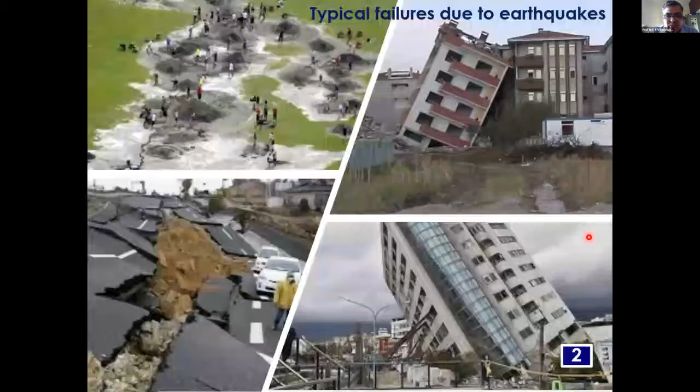Going to the next, in order to explain why we are doing all this - the second term, what dynamic compaction is basically - the typical failures that can occur, which is the theme of the conference, is how earthquakes can actually create distress. I have seen that Professor Gopal Madabhushi and Professor Elgamal and other experts are actually going to speak.

These type of things, when they actually happen in our case, can cause alarming situations to us. And despite other virus problems, we can also have problems due to these particular natural hazards. So what you see here is what I understand as the Christchurch liquefaction, which has been put up by NDMA, and there are also some building failures.

As you can see, these are some typical failures of a road and a building collapse. These things actually cause alarming situations as far as this is concerned.

If you try to find avenues for improvement, we actually have many methods for countermeasures. So I'm concentrating here on what are the countermeasures against liquefaction.

We all know liquefaction, and methods to prevent or counter its occurrence mean you actually have to do correct ground improvement. One method is increasing density, solidification, adjusting the grain size distribution, and lowering the degree of saturation. Below the foundation, they try to pump air so that the degree of saturation of the soil is decreased, and the lower the degree of saturation, the less susceptible it is to liquefaction.

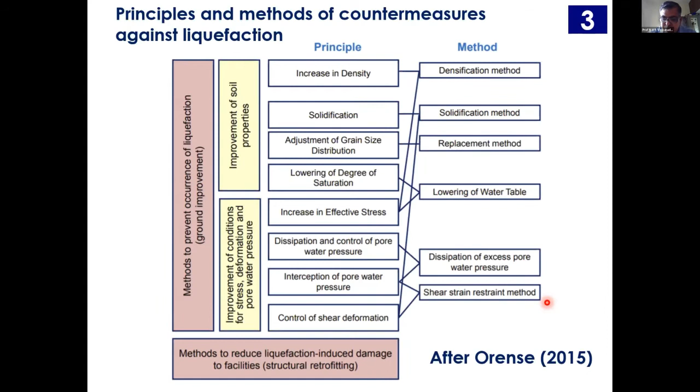So before that, why do we need to model the earthquake in the centrifuge? Is there any relevance? One thing is that earthquake centrifuge modeling addresses one of the natural phenomena that occurs in the field, which has got ill effects, damaging structures and subjecting them to distress.

Though a lot of work is happening, very little quantitative field data exists on the response of soil deposits and geotechnical structures to strong motion. The opportunity is basically to study the phenomenon of earthquake-induced liquefaction and the principle driving this.

Many people have done classic work here, which I'm not going into detail on. But what centrifuge model testing offers is basically a unique opportunity to test the performance of structures before the earthquake, to see what actually happens.

In fact, now with the advent of high-speed cameras, we can see how the structure is actually performing during the earthquake. Otherwise, without these, we used to see only before and after the earthquake. But now, with cameras recording at 500 or 1000 frames per second, they are able to capture what is happening before and during the earthquake.

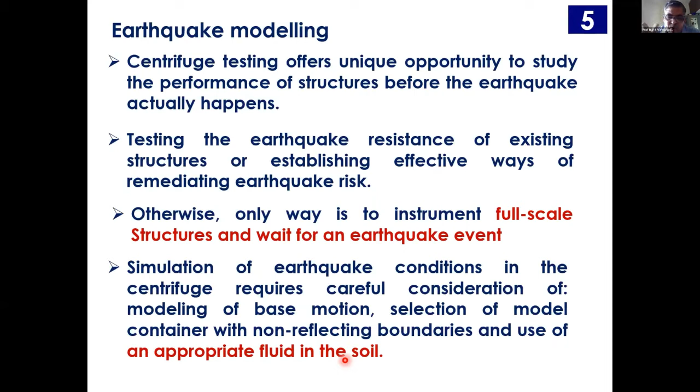This non-reflecting boundary concept is very interesting, and maintaining the leak proofness of that is very, very difficult and important. What I'm highlighting here is the requirement of an appropriate fluid in the soil, which we will discuss. In modeling earthquakes, one requirement is a powerful base motion creator, what we call a shaking system, and the second is a proper earthquake model container - generally hexagonal or rectangular shape - along with the need for tweaking the model pore fluid, which is very difficult.

Now let us consider this, from my lecture notes: an embankment having prototype dimensions, with length L and a certain height, subjected to sinusoidal motion. Let the displacement be given by amplitude in prototype times sine of 2 pi fp tp, where tp is the time and fp is the frequency.

When you differentiate once, you get the velocity of the small element, and differentiating again you get the acceleration, which is minus 2 pi fp whole square times ap times sine 2 pi fp tp. This is the amplitude of the perturbance actually subjected in the field.

Now assume that when considering small scale physical modeling, L becomes L by N, and the element with dimensions dx, dy, dz becomes dx by n, dy by n, and dz by n - the volume is reduced by 1 by n cube. But if the stress is sigma in the field, the stress in the small scale model is also sigma.

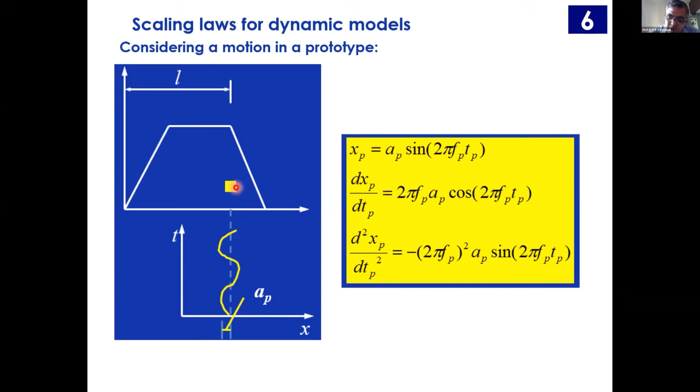So let us consider a model where Lm equals Lp by n, with a small element dx by n, dy by n, dz by n, subjected to the same or identical motion: Xm equals Am, the amplitude in the model, times sine 2 pi fm tm. Suppose the amplitude in the prototype is 15 mm - in the model it will be 15 by n.

N is nothing but the gravity level at which it has been subjected. That means if you scale down by, say, 30 gravities, then n equals 30, and since Lm equals Lp by n, this n equals 30.

If the material is uniform with unit weight gamma, then at this point the stress is sigma v equals gamma into z, or gamma written as rho g z. So sigma v equals rho g z, but mass density is the same in model and prototype.

With that, when gm becomes n times gp, and hm equals hp by n, what happens is the stress in the model, sigma v, equals rho g hp. That means if a small scale model is scaled down by n times and subjected to n times the gravity level, there is stress equality.

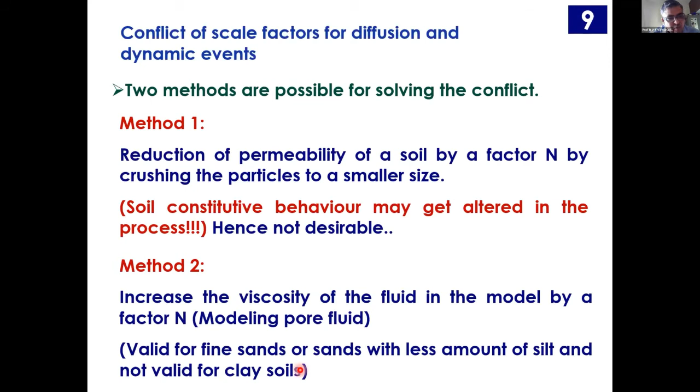But if you are having fine sands and sands with some fines up to 10%, I'm talking about non-plastic fines, there is a possibility that we can replace the pore fluid. How can we replace it? Let us see. First method is ruled out because crushing of soil particles is very, very difficult.

Now, while teaching permeability, we introduce a term called coefficient of permeability, K, absolute permeability, and unit weight of water, and kinematic viscosity of water. K, the absolute permeability, is a function of the Kozeny-Carman equation, or Taylor's equation when you consider it. Higher the specific surface area, less is the permeability. All those things we know. So K is the absolute permeability, which is a function of the soil skeleton.

If you are able to have an identical soil skeleton, then Km and Kp both are the same. Gamma W is nothing but the unit weight of water. Mu is 1 centistoke at 20 degrees, for water at 20 degrees, that is the kinematic viscosity of water.

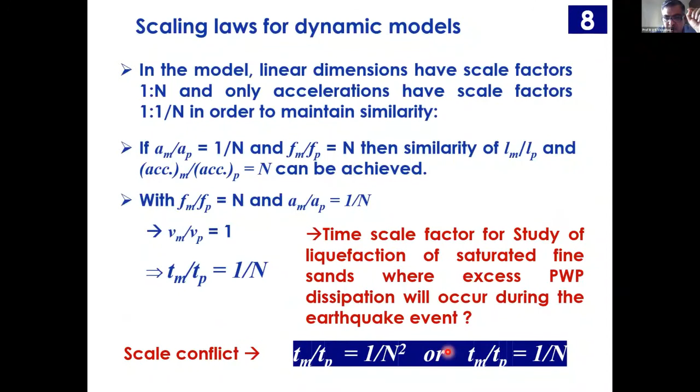So Vm is equal to Km Im, Vp is equal to Kp Ip. With that, I will get Vm is equal to Vp, that's Darcy velocity or flow velocity, which is the same, but Tm by Tp is equal to 1 by n. So with that, I'm able to match these two scale factors. Previously, it was 1 by n square, now I have got both the scale factors to equal 1 by n. This means you actually need to substitute water with a conventional pore fluid. We are having several pore fluids in the market.

For example, 100 centistoke silicone fluid is 100 times more viscous than water but has virtually the same density, though it's actually a little lighter than water. Suppose you are having a higher viscosity fluid, like mercury, with higher density. There is a possibility that the stresses in model and prototype don't match with each other.

Then the response of the model and prototype will be a problem. So if you are able to replace the pore fluid and get Km equal to Kp, and the time scale factor for diffusion equivalent to 1 by n, then there is a possibility that Tm by Tp is equal to 1 by n.

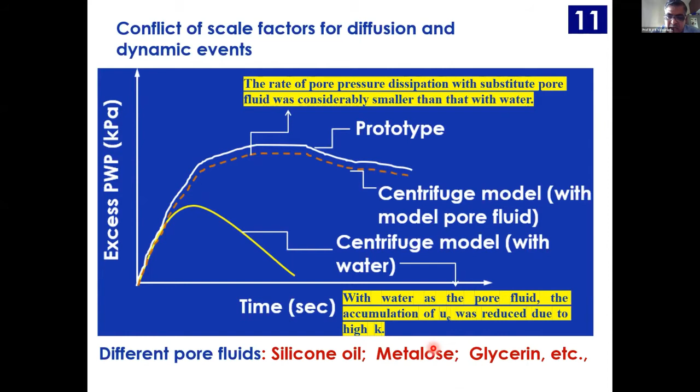Very recently, the centrifuge modelers—I should thank them—brought methyl ether or methylcellulose, one of the products used in bakery, into centrifuge modeling. It's very costly, but it's actually going to give you the flexibility needed.

So in order to do this, before that, I will get connected again on how we can actually model that.

Let us now talk about dynamic compaction. This is described in the German Geotechnical Engineering Handbook published in 1996. Dynamic compaction is nothing but dropping a known weight from a known height—it's actually potential energy.

When you do this in the primary pass, it's called grid spacing, 6 meter by 6 meter, and then you do it here and here, so there is a possibility that the entire ground can be impacted. The equipment requirement is very small, but there are conditions: particle velocity should not be high, and nearby structures should not be present.

Here, the potential energy scale factor in model and prototype is 1 by n cube. So the use of centrifuge modeling, and how to use it, is the main crux of this. Basically the pounding creates a depression, called a crater, at each drop location, and in the process it produces areal settlement and also displaces the soil.

If you look overall, dynamic compaction creates a drop height and uses a tamper. People have varied the tamper shapes—square, octagonal, triangular—and found that the octagonal one is effective, but we have actually taken a circular one.

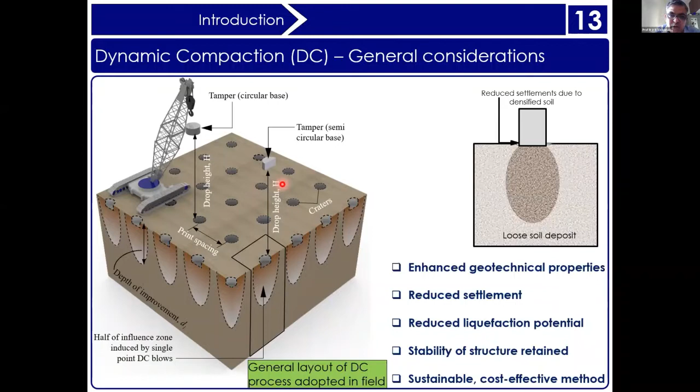With that, what happens? Enhanced geotechnical properties, reduced settlements, reduced liquefaction potential, and stability of the structure is retained—a sustainable and cost-effective method. These are the depths of improvement: for granular soils it's something like 4 to 5 meters, so definitely you can get that improvement depth. This is one of the octagonal tampers or pounders used. When you do this, you cover the entire loose area. Very, very nice.

I've noticed that in India, many people are actually using this. One thing I request you to note down: 10 to 20 meters is the height, even reduced by centrifuge modeling by n, to 20 by n meters. That means it's very difficult for me to put a crane at high gravities and do that. So for that, we need a mechanism.

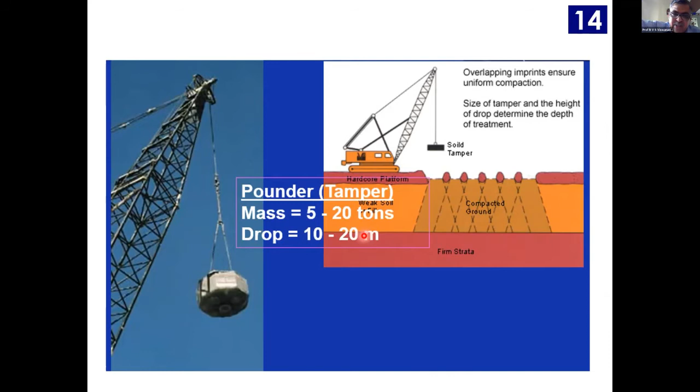This particular technique was actually put forward by Menard in 1975, wherein the illustration of the dynamic compaction is that whenever a drop is actually created, then it creates some sort of P and S waves, and Rayleigh waves are created. So you can see that.

Sorry to interrupt, sir. Another 5 minutes max.

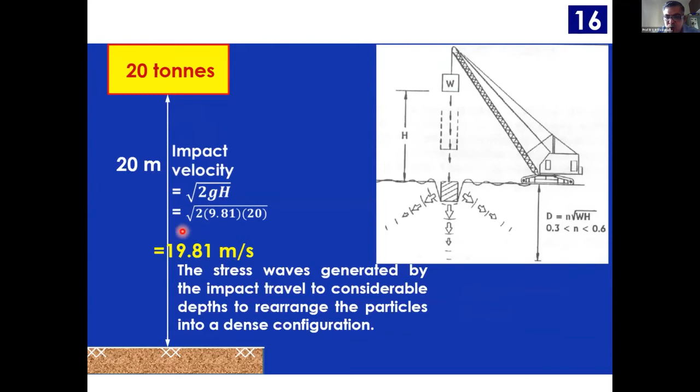Okay, so densification actually takes place. So when you model this in the prototype, the impact velocity is nothing but root of 2GH. Initial velocity is 0. With that, you will get 19.81 meters per second. And when you do this in centrifuge, you can see the same impact velocity — I'm able to do that with V equal to root of 2GH, but G is equal to nG. With that, 19.81 meters per second, I'm able to maintain. This is at 50 gravity.

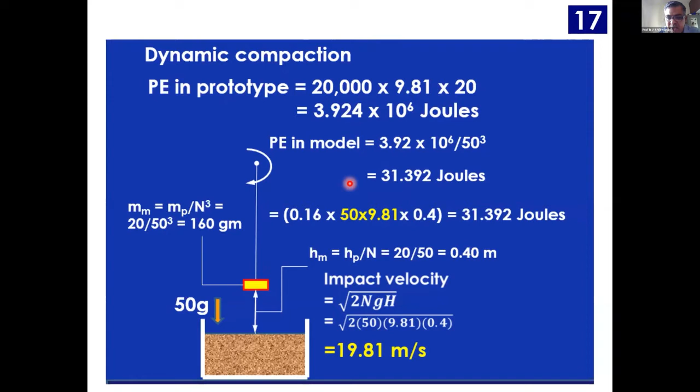But let us say that if I'm actually modeling some 20 meters and 20 tons, then I have the potential energy which is modeled. So this is how the potential energy which is required, potential energy in the model. Based on that, the dynamic compaction can be created in the model. This is how the problem is explained.

So based on a lot of deliberations, we actually have derived the scaling laws. Here also, the frequency of the blows will be n times, and the duration is 1 by n times, the duration between each blow.

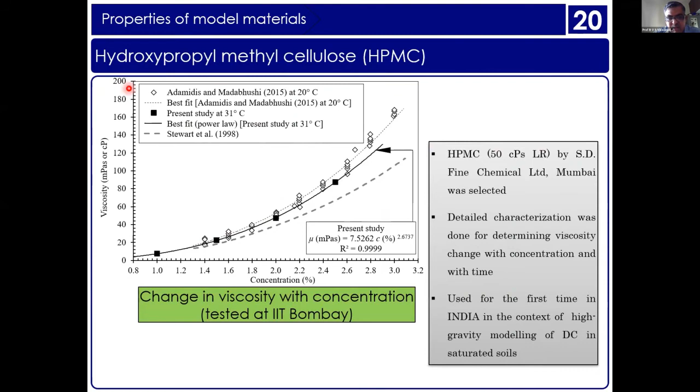So we actually have two soils, one is sand and one is silty sand. Because we wanted to replace with a viscous fluid, we tried different viscosities with the methocel we have taken, and we found that it is in line with results published elsewhere. We also looked at how its viscosity changes over time in days, and whether tau versus sigma is okay or not. We also saw from the oedometer test the constrained modulus at 150 kilopascals, how you are getting it. And we also saw that with increase in viscosity, the permeability of the sand is actually decreasing. All those things we have done.

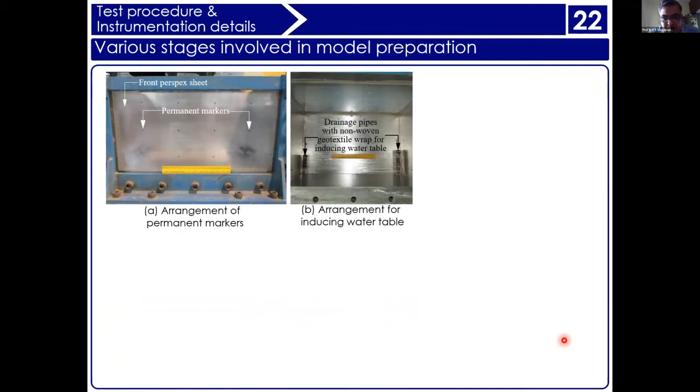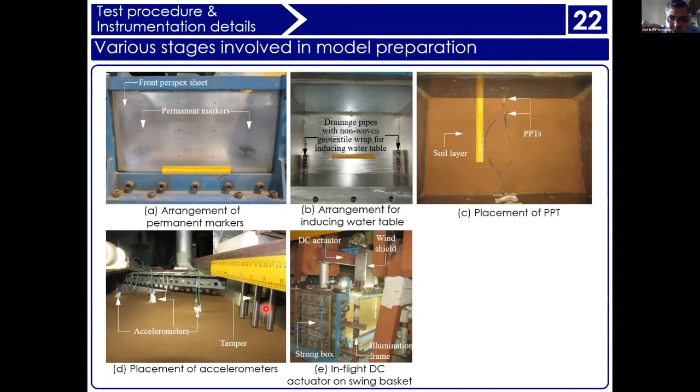This work is in our paper in the ASTM Geotechnical Testing Journal, and those who are interested can refer to the paper. Here what you are seeing is the guiding rods. As I was mentioning, the Coriolis effect is actually going to cause a big problem, so if the tamper is lifted up, it's actually used to create a problem.

So this is what we have done with sand and silty sand with water table. This is how the setup is about to be tested. We put a DC motor and actuated this, and designed a very nice mechanism, placing it perpendicular to the perspex glass so that we'll be able to view from the camera. You can see it will take 1 or 2 minutes — let me just see whether it is working or not.

Let me see. Normal presentation, which works. But...

What happens is that the tamper moves down and down, and there are 16 drops given. So with that, you will see the densification, which is not coming here yet. Now I think it's coming.

Maybe the organizers — I request you for 5 more minutes, Professor Janaki Ramaya. Sure, sir, sure, thank you.

Okay, so you can see that as the drops are being done, this is happening at 30 gravities — please understand. And when you see it in parallel, the excess pore water pressure generation can also be seen.

So this is how the tamper is actually working, and the model is rotating about a vertical axis in a horizontal plane. And what we are seeing through a camera here, because of that, we are seeing this view. And this is the accelerometer which is recording.

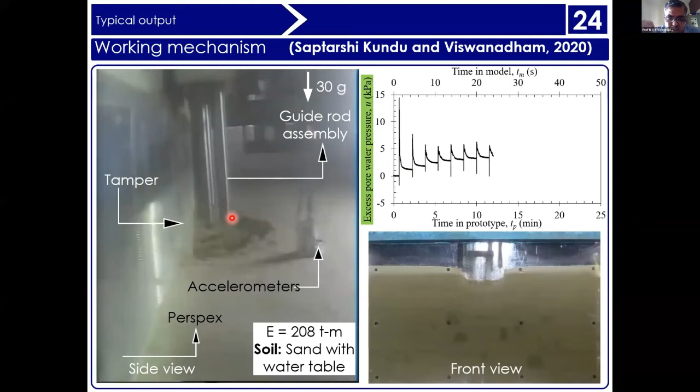These guide rods are very much important because when the centrifuge is rotating about a vertical axis, any movement of the object within the model is subjected to Coriolis acceleration, which actually laterally drifts it backwards. In order to keep that in place, we had to really struggle to resolve this one. And the moment we solved that, the PhD student completed the work.

So you can see how for each blow, how the excess pore water pressure is being developed. You can see, that is total. You will see 16 peaks, that means 16 drops. Why 16 drops? Because mostly for each location, 16 drops are actually adopted in the field.

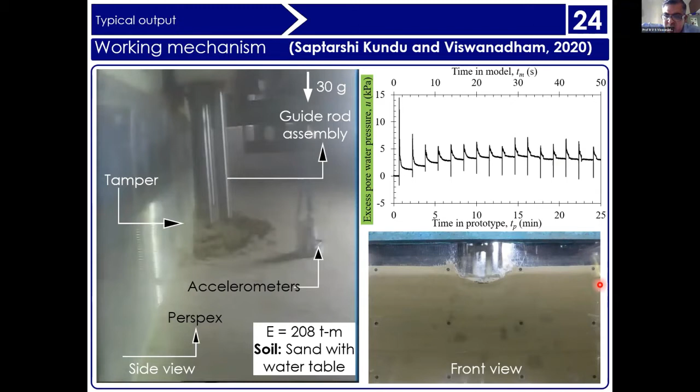You can see this one is circular. That actually indicates a proof that the water table is circular, because water is not having any shear strength. Because of that, it will actually take the circular shape. So several tests have been done.

And what you can see is that this is with water. You can see that rapid dissipation. But when you have the HPMC, the dissipation is actually somewhat slower. When you have got the silty sand, there is an excess very high pore water pressure. And when we have used this one, what you can see is that dissipation is found to be very, very slow.

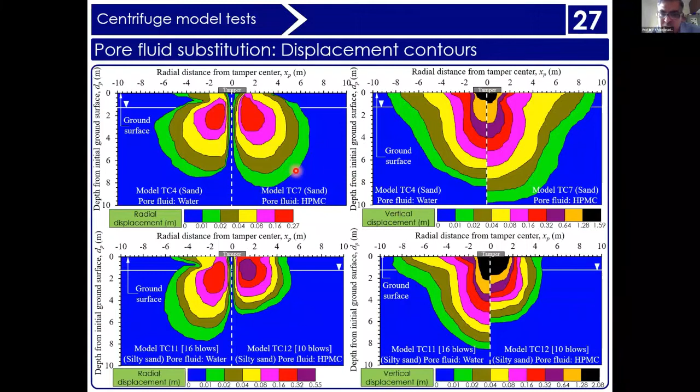So this we have used further for the particle image velocimetry to get the so-called pore fluid distribution and increase in densification for each drop, for different cases with water as well as HPMC. Our paper, which is there in ASCE Journal of Geotechnical and Geo-Environmental Engineering, also discusses this, for those who are interested can refer to that particular paper. And what you can see is that this is the depth of the crater improvement.

Up to 5 meters, we could actually record the improvement of the so-called increase in the relative density. You can see delta RD, that much is the increase in improvement. So these are the peak particle velocities, ground accelerations which are recorded. Away from the location, you can see that the velocity is found to decrease.

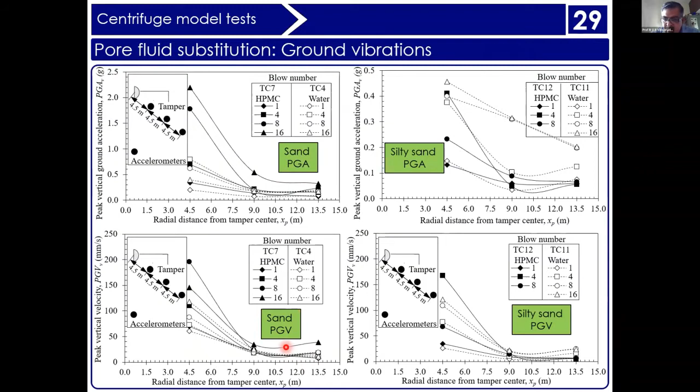And we found that there are in fact measures also which we can do for mitigating them. So what I wanted to say from this is that, of course, why I have shown earthquake modeling is because there is a requirement connected to modeling pore fluid.

But otherwise, the present research work, basically for the first time as far as I know, to the best of our knowledge, HPMC was used for dynamic compaction. And that too, we have not explored for higher fines. In fact, we are able to use it for higher fines, and with some other modifications we can actually generate much more information.

This research work presents the effectiveness of dynamic compaction for reducing the liquefaction potential for loose sand deposits. In fact, we are now trying to apply this technique for loose municipal solid waste deposits, because municipal solid waste deposits are also like sand, with very high permeability, but the only difference is high compressibility. So if we are able to use this, there is a possibility that we can increase landfill capacities and so on. So basically, this is what we wanted to show.

In fact, we wanted to do this for multiple points. Now we are actually extending that particular work, and the results can subsequently be employed to focus on the effects of expensive field trials and so on.

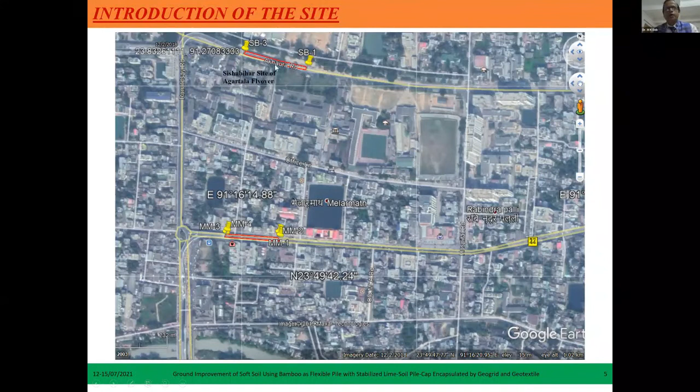Now, as I said, there was a superstructure of vertical reinforced wall, RE wall, filled up with suitable sand, which exerts pressure on the ground soil. These are facing panels vertically erected with high adherence reinforcing steel plate within. So we have to fix these unstable conditions so that there shall not be any settlement. There is a special requirement of this type of structure - it needs a flexible base. The base below this type of RE wall shall not be a rigid one.

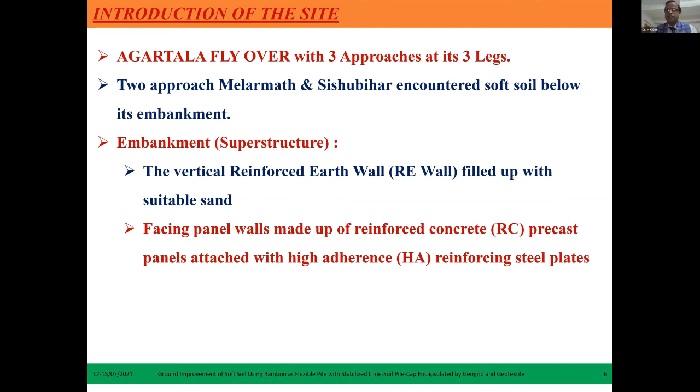So this is also a challenge that we have to take forward. What we have done is put 3 sections. Section 3 is 28.5 meters on the abutment side, section 2 is 53.94 meters, and section 1 - these gradually meet the existing road level. Section 3 is the highest one, around 5.796 meters, section 2 is around 4.67 meters at its highest point, and then section 1.

So for these 3 sections, we have a different approach to make it. This particular presentation and paper we discussed - we have put just some glimpse on that. This is a huge work that we have to carry forward with much more detail. So just a historical background of this particular site.

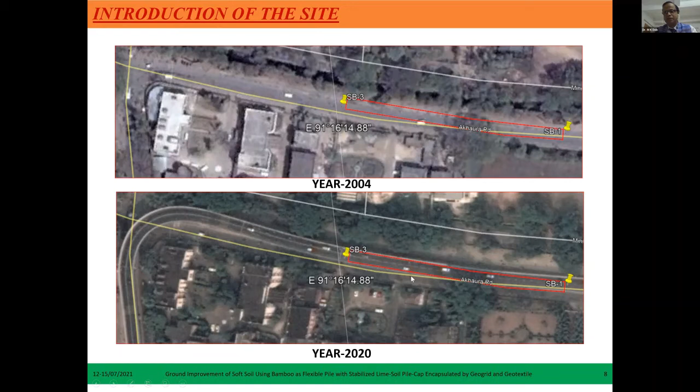This is the site at the year 2004. If you can see, this is a shortcut. Then in the year 2020, after completion, you can see this curve has been made mild after completion of the Agartala flyover. So our embankment approach is here. These are the concern areas where we have put this thing, and we have encountered the soft soil problems here.

Now there are some problem identifications - we have a very soft, sensitive clay, silty clay. The N values are 1 to 3, C values are around 1.5 to 3.2 ton per meter square like this. And these are not uniform - they vary in depth, they vary in width also. So we had to conduct a lot of soil investigation at that time. Time constraint was the major problem because this particular soft soil problem was not addressed during the preparation of the DPR.

When the construction was almost near completion, they encountered this problem and came forward to Jadavpur University. So these were time constraints - we could not put things on hold, we had to go with the time. That was the main constraint.

The conventional foundation system, with another superstructure slab span on top, would induct a lot of cost because a 40-meter pile was there in the other span - a huge cost. Also, ground improvement professional agencies are very rare in this Northeast India region. All available agencies are from outside and very busy with railway department constructions, so they were not available to get it done in a short time.

Existing city roads are there, over which the flyover erection is planned, so existing traffic movement shall not be interrupted. On both sides, at the existing road level, there is a series of shops, so we do not have much space to utilize for making an amendment or providing ground improvement techniques. Also, we do not have many expert professional agencies ready to get it done with no time.

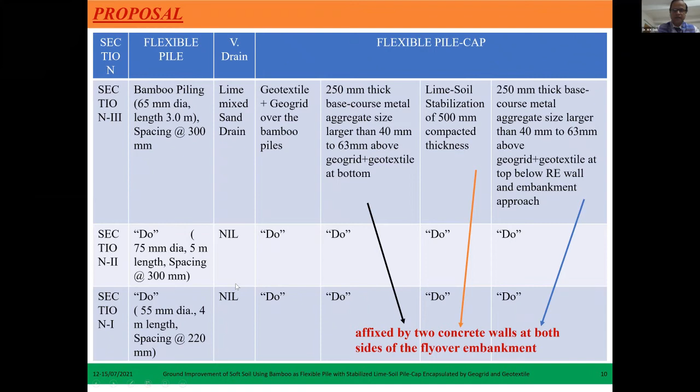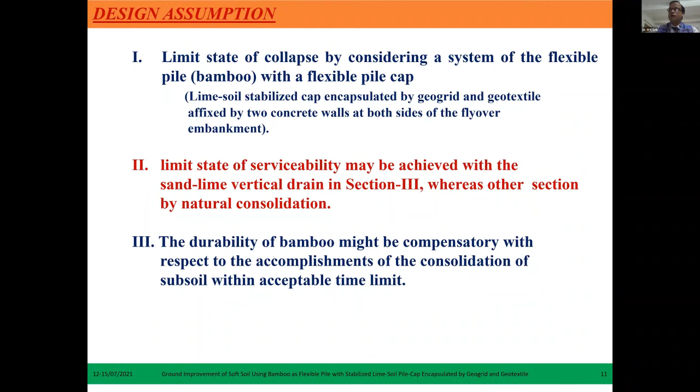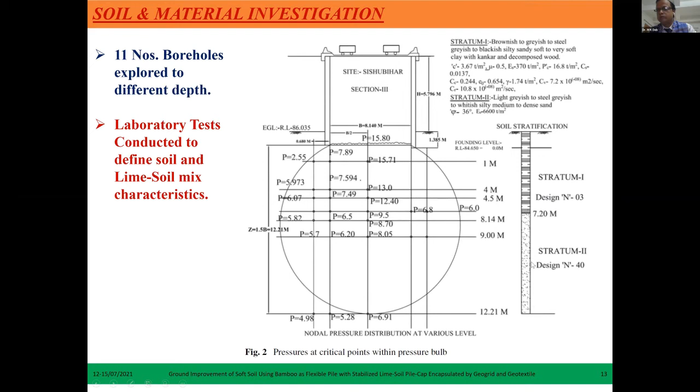You can see the soil properties here. Stratum 1 has design N of 3, although 1, 2, and 3 we have encountered. Then it is some dense soil, dense sand. So these are the conditions.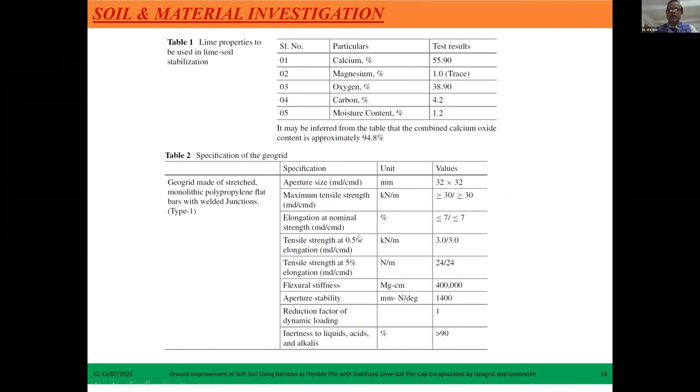Now these are some soil properties and lime properties, and you can see the specification of the geogrid that we have used.

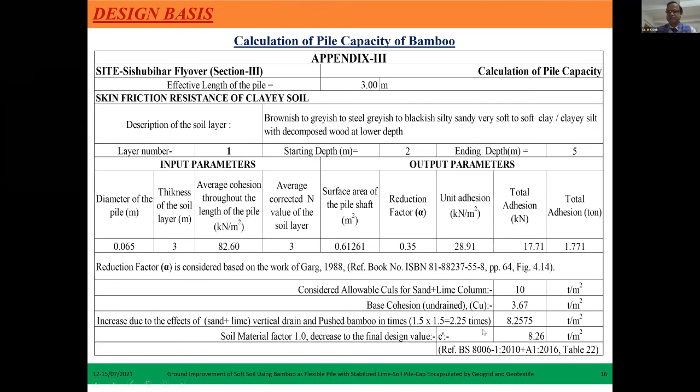So these are some simplified calculations we put together, where we increased 1.5 times the capacity of the C value with respect to the bamboo piling effect, due to the confinement of the reinforcement in the soil, and 1.5 times because of the vertical sand drain and lime-soil drain introduction. So we got this and found the pile capacity around this value.

So what is special about this design is that the cohesion ranges from 1.5 to 3.67.

We have also considered alpha adhesion reduction factor for the piling: 0.35, 0.4, 0.32 with respect to the cohesion below. Then we have a multiplying factor of 2.25 for the basic C value, as already mentioned, and load factor already we have considered as 1.3.

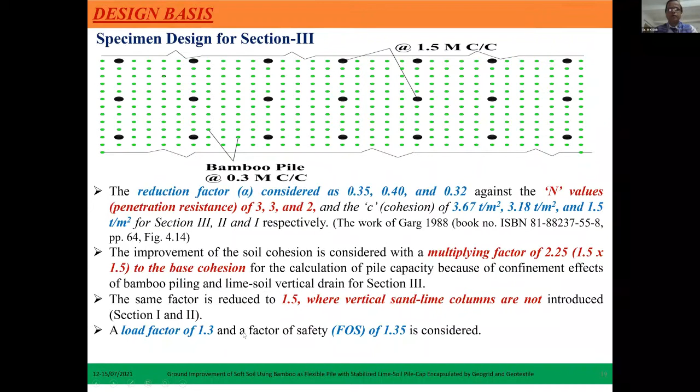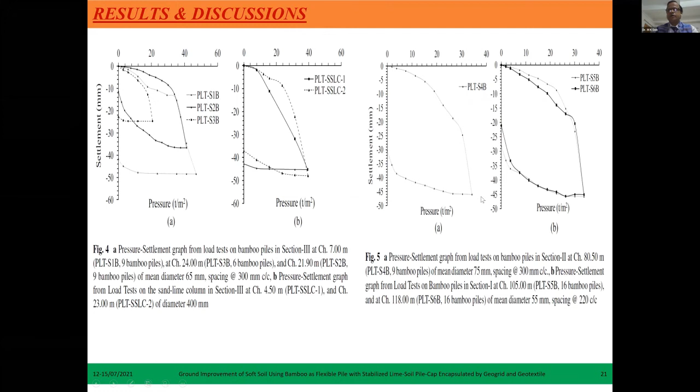So can you... is the time up? Can you move on? Yes, just closing this, very near to that.

Required pile capacity without factor is 0.988. If we multiply it by 1.3, it is 1.284. And if we calculate the pile capacity unfactored, it is 1.94. So designed allowable pile capacity we predicted was 1.43, and actually we have got 1.92. So these are the variations.

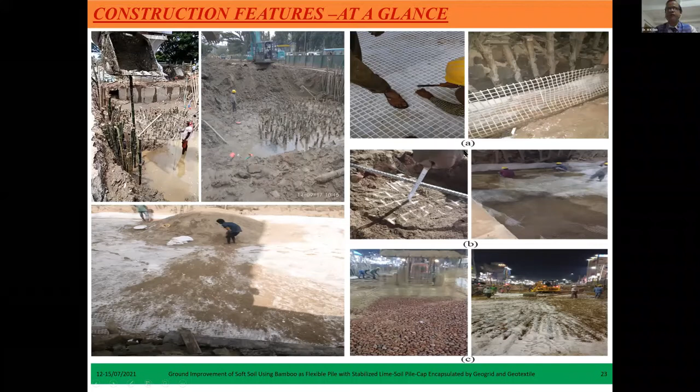Our design assumptions are validated by this type of model experiments, which we decided to go for. So now these are some steps: you can see the positioning of piling, positioning of lime-soil stabilization, aggregate positions, position of the geogrid elements, compaction levels, and quality control. You can see some of the peaks, some movements there, and some plate load test experiments.

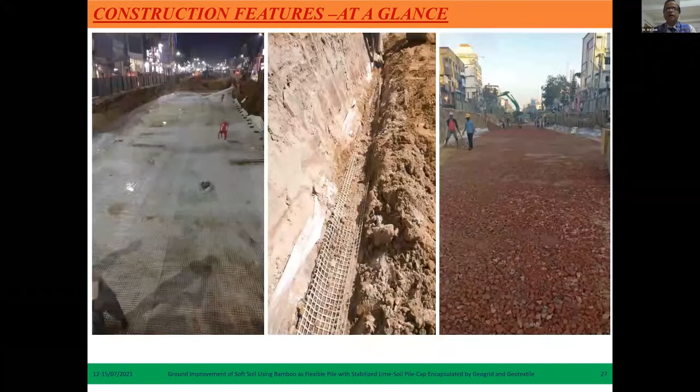So please, conclusions please. Yes, yes. So now this arrangement is practically...

Now it's almost 3 years, and there is no distress - it is working very well. The stabilized lime-soil of 1 meter thickness lime-soil drain can attain much more strength with respect to time than what we designed for. The strength nowadays has already increased.

This new ground improvement system - we understand we need to prepare a lot more numerical modeling to develop that. We are working on it.

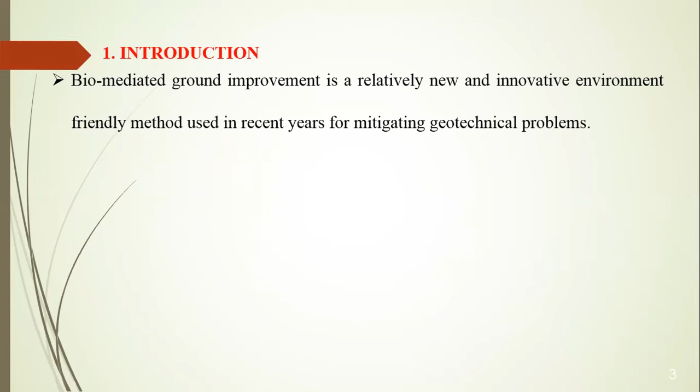There are different methods for introducing calcite into the soil within the soil particles. Microbial induced calcite precipitation in this work uses the urea hydrolysis mechanism. The MICP process has two major applications: bioclogging and biocementation.

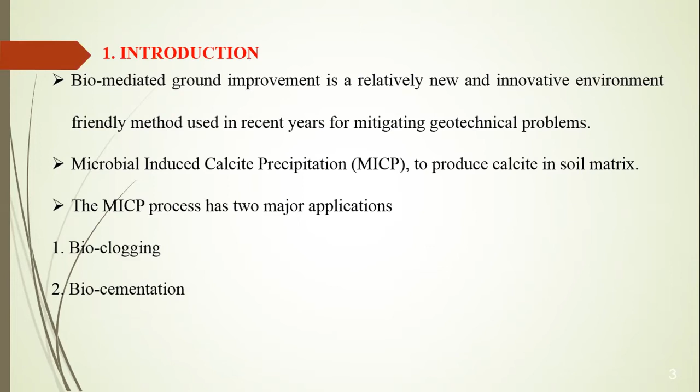Bioclogging is when the pores of the soil particles are clogged by introducing calcite within them. Biocementation is the cement, or calcite, precipitated due to microbial activity, which cements around the soil particles and covers all the surface of the soil particles, thus known as biocementation.

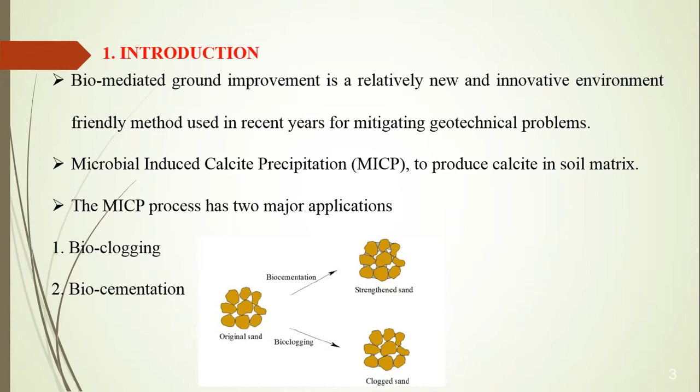Bioclogging and biocementation have two major applications in geotechnical engineering. Biocementation strengthens the sand or soil particles, improving the strength of the soil, while bioclogging reduces the permeability of the soil.

Regarding materials: black cotton soil is used in this work. The free swell index, specific gravity, liquid limit is 88%, plastic limit is 43.33%, plasticity index is 44.67%, shrinkage limit is 7.52, dry density is 1.44 gram per cc, optimum moisture content is 29%. The swelling pressure and soil type as per IS code is highly compressible.

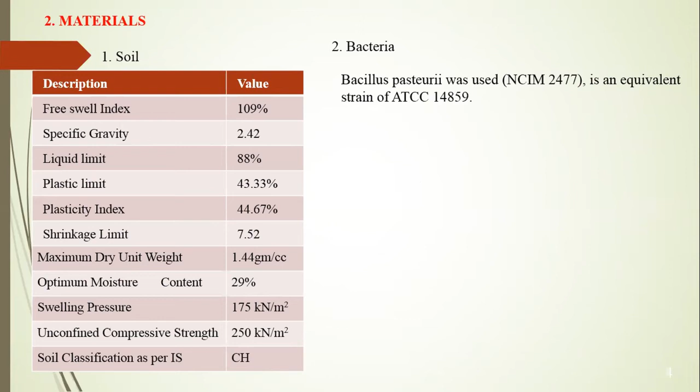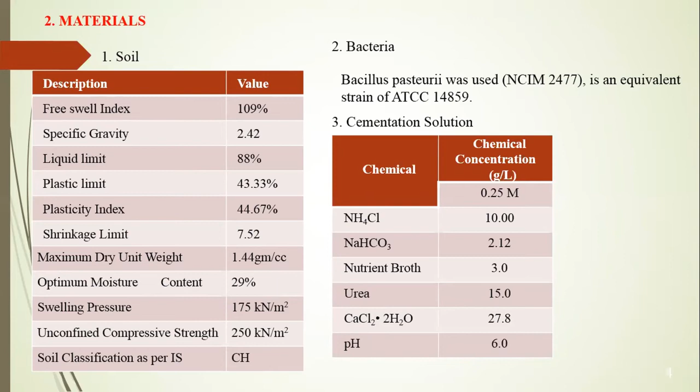In the material section, the microorganism or bacteria used is Bacillus pasteurii. The cementation solution is another material used. Table number 3 shows the cementation solution contains NH4Cl (ammonium chloride), sodium bicarbonate, nutrient broth, urea, calcium chloride, and the pH of this cementation solution should be 6. This is the bacterial solution and this is the cementation solution.

This is the methodology: the bacterial concentration is 5%, 10%, 15% and 20% by weight of the soil, and the bacterial solution is added in the proper manner at these percentages. The cementation solution is taken proportionate to the weight of the soil. The bacterial solution and cementation solution are mixed with the soil, and then samples are prepared for further testing.

These samples are tested for UCS at a 0-day reaction period, that is instant testing, then kept for a 7-day reaction period, and also kept for a 14-day reaction period to check the effect of microbial induced calcite precipitation on the soil. Then these are the results.

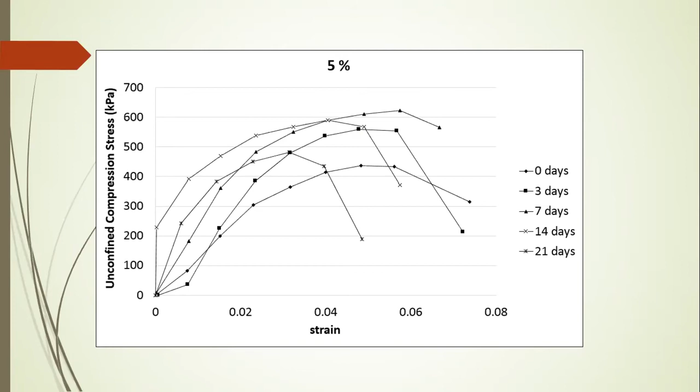This graph shows the relation between strain and stress for 5% bacterial concentration. According to the reaction period, the unconfined compressive strength increases. For 5% bacterial concentration, the 7-day reaction period gives the higher strength, as 623 kilonewton per meter square.

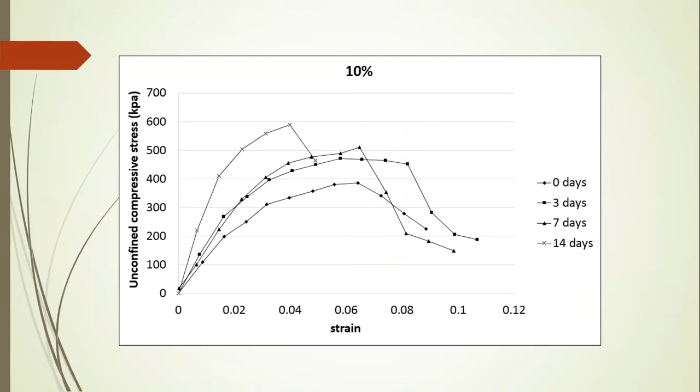This graph shows the 10% bacterial concentration stress-strain relationship, where the 14-day reaction period gives higher strength compared to the 0, 3 and 7-day reaction periods, though after 14 days, the 7-day reaction period gives higher strength. For 15% bacterial concentration, again the 14-day reaction period is suitable.

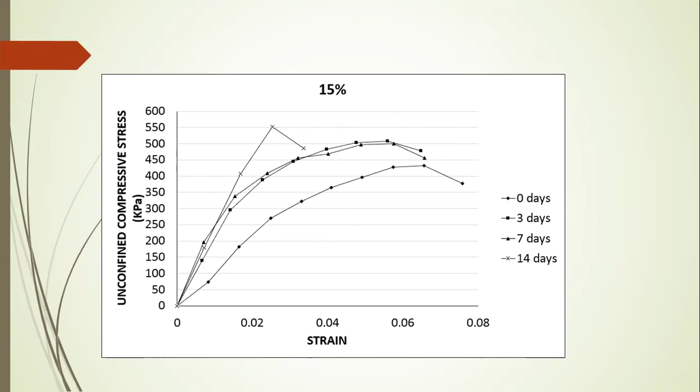Madam, we have 1 minute more.

So these are the conclusions. The unconfined compression strength increases for all bacterial concentrations compared to untreated soil, and it increases with reaction period for higher concentrations of bacteria. For black cotton soil, 5% bacterial concentration was found to be the optimum concentration, and 7 days the optimum reaction period to achieve maximum strength. The use of MICP, microbial-induced calcite precipitation, as a stabilization agent for black cotton soil would be a green, sustainable and eco-friendly technique. These are the references.

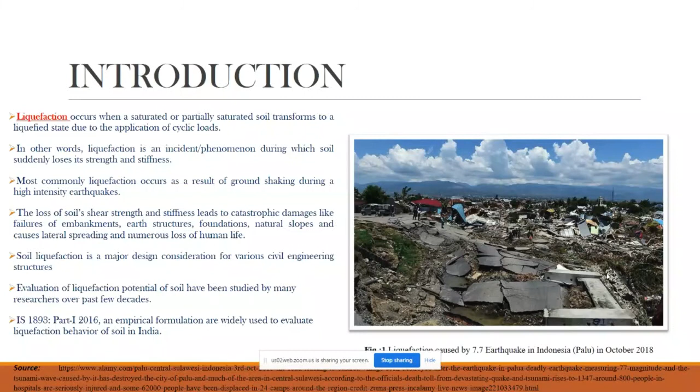Liquefaction of soil has been categorized into two parts: flow liquefaction and cyclic mobility. Flow liquefaction is less likely to take place compared to cyclic mobility, but its effects are generally far more severe. This is the mechanism of liquefaction.

Initially, there is an increase in pore water pressure that leads to reduction of effective stress. The transfer of intergranular stress takes place from soil grains to pore water. When this transfer completes, soil loses its strength completely and exhibits liquid behavior. Due to this loss of strength, consolidation starts, followed by surface settlement, leading to sinking of structures resting on it.

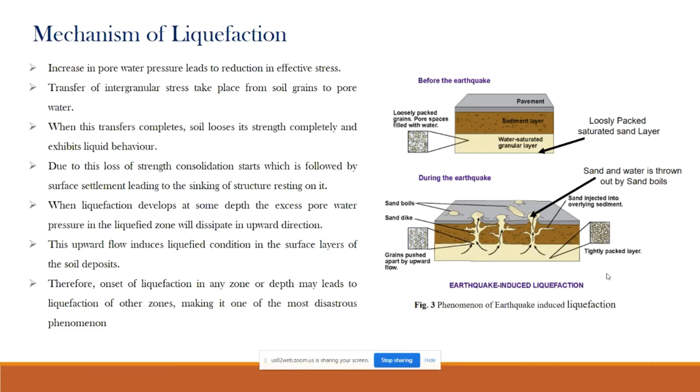When liquefaction develops at some depth, the excess pore water pressure in the liquefied zone will dissipate upward. This upward flow induces liquefied conditions in the surface layers of soil deposits. Therefore, onset of liquefaction in any zone or depth may lead to liquefaction of other zones, making it one of the most disastrous phenomena.

The first step of liquefaction hazard evaluation is usually the evaluation of liquefaction susceptibility. If the soil at a particular site is not susceptible to liquefaction, hazard evaluation is stopped. However, if soil is susceptible, the matters of liquefaction initiation and effects must be addressed. The criteria by which liquefaction is determined are historical, geological, compositional, and state criteria.

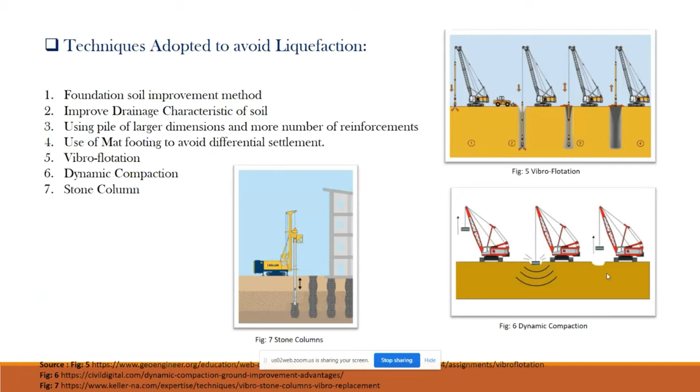These are a few very famous techniques adopted for liquefaction mitigation at sites: vibro-flotation, dynamic compaction, and stone columns are among the most prominent methods.

Now I'll give you a brief literature hint of the present study. It was generally believed that the presence of fine content, whether plastic or non-plastic, helps in resisting liquefaction susceptibility. But this belief changed after a series of fine-grained soils liquefied during the Northridge, Kocaeli, Chichi, and Bhuj earthquakes in their respective years. Thus, the response of fine soil deposits under dynamic loading became an important field of study and research.

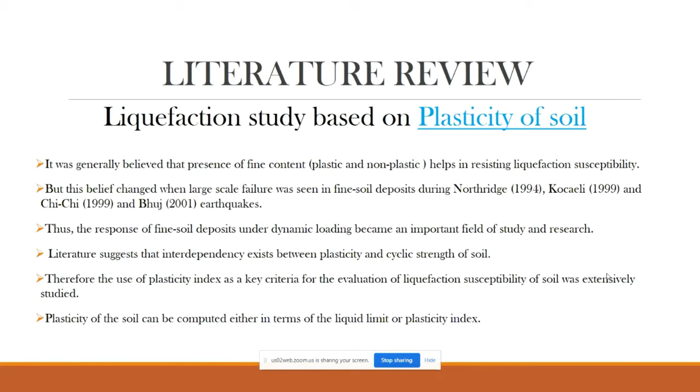So the objective of the study was to evaluate the liquefaction susceptibility of soil using IS codes for river Ganges alluvial soil deposits. This area is significant in terms of economy, population, as well as it falls under seismic zone 4 according to IS code.

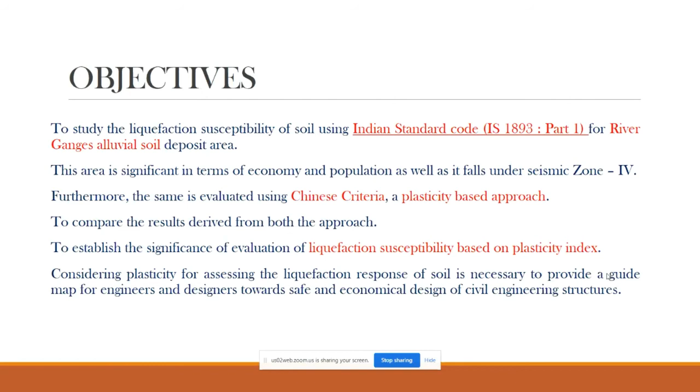Furthermore, the same site is evaluated using a Chinese criteria. This criteria was proposed based on the plasticity based methods to compare the results derived from both the approaches to establish a significant evaluation for liquefaction susceptibility based on the plasticity index.

These are the methods. This is a basic equation that has been used for determining the CSR, that is cyclic stress ratio, CRR, cyclic resistance ratio, and the corresponding ratio provides us with a factor of safety. And if factor of safety is greater than 1, the soil is termed to be safe, and if it is less than 1, it is termed to be unsafe and prone to liquefaction.

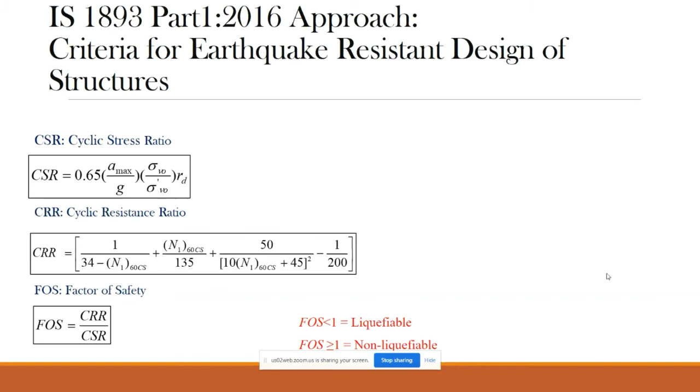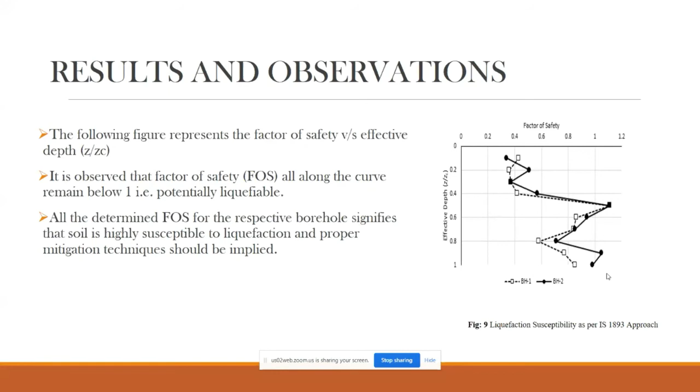In the present study, we have 2 different boreholes, so their factor of safety were determined using the IS code methods, and you can see that more or less the site is prone to liquefaction. The factor of safety is less than 1.

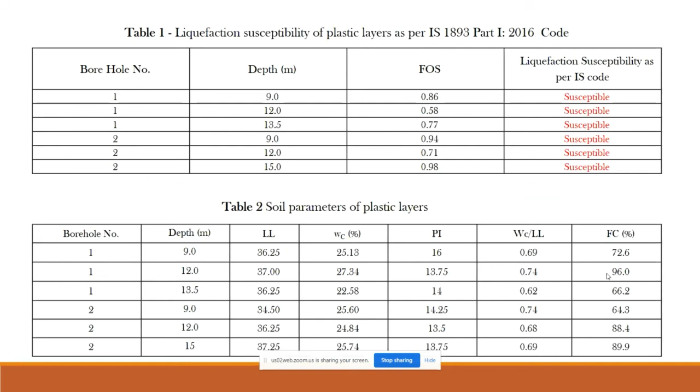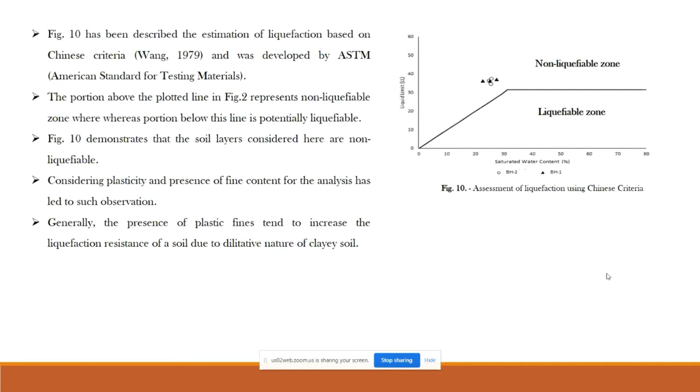Table 2 shows the soil parameters of these layers - plasticity index, fine content range, water content to liquid limit ratio. Further, this was the graph proposed by ASTM, American Standard for Testing Materials, based on Chinese criteria proposed by Wang in 1979. You can see water content on the x-axis and liquid limit on the y-axis, and the line we have achieved divides the graph into liquefiable and non-liquefiable zones. Based on this, you can see that all the plastic area falls under the non-liquefiable zone.

So this is what it explains - table 3 clearly embarks that the plastic soil layers become non-susceptible to liquefaction when evaluated using Chinese criteria. In some cases, it gives significant results as compared to IS 1893 Part 1 2016 code, particularly for soil with plasticity. This directs that consideration of plasticity may play an important role in evaluation of liquefaction susceptibility of fine-grained soil.

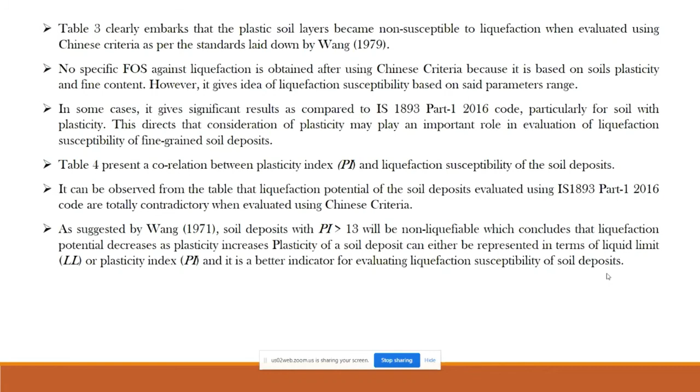It can be observed from the table that liquefaction potential of soil deposits evaluated using the IS code are totally contradictory with the Chinese criteria. So more on the conclusion, the natural variability of soil conditions on the bank of Ganga River in Patna district, Bihar, allows significant study focusing on soil plasticity to figure out liquefiable deposits.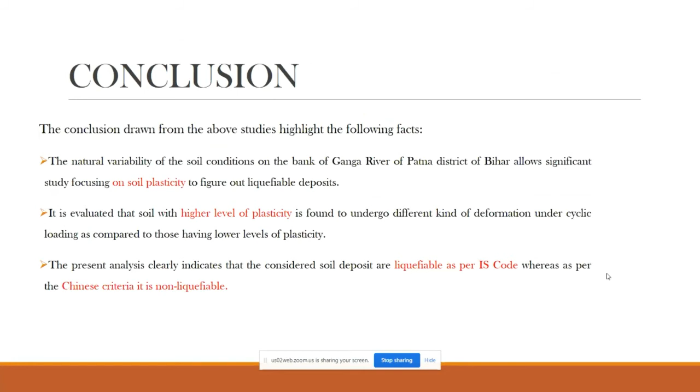It is evaluated that soil with higher level of plasticity is found to undergo different kinds of deformations under cyclic loading as compared to those with lower level of plasticity. The present analysis clearly indicates that the considered soil deposits are liquefiable as per IS code, whereas for Chinese criteria they are non-liquefiable. This signifies that considering plasticity, water content, liquid limit, and fine content as governing criteria may provide an alternative response. There is no clear demarcation of plasticity in these empirical methods.

Considering plasticity for soil evaluation response has resulted in totally contradictory observations as compared to the approaches, and construction of structures on liquefiable zones requires a great amount of investment. So, if plasticity is believed to be a major discriminating criteria in the above mentioned case, it can be inferred that the sites which are said to undergo liquefaction will lie in non-liquefiable zone, thus contributing to a huge saving in the cost of construction. Thank you.

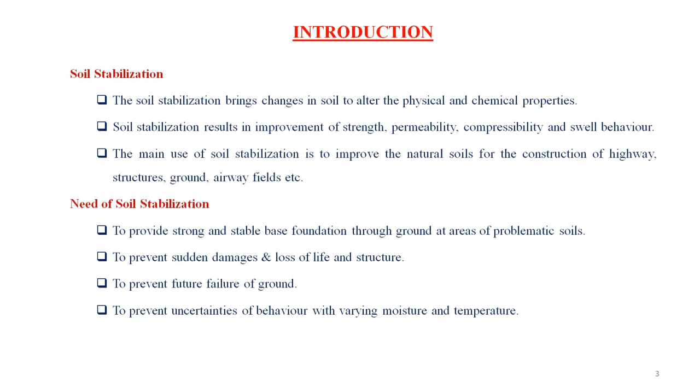Moving to the background, different methods of soil stabilization are there, including mechanical, chemical, fiber reinforcement, stabilization using different waste materials like plastic, rubber, husk, ashes, etc., bituminous and asphalt stabilization, and grouting and columnar injection. So different methods of stabilization are there.

For the present study, I chose chemical stabilization because of its benefits. Other methods are also applicable, depending upon the type of soil and other factors. But here I took chemical stabilization, which is very efficient, effective, and a smaller quantity of chemical is used. So along with other methods, there is a need to alter the properties of soil at a microscopic level.

So it behaves well with the problematic soil, and the deflections, damages, and differential movements that are going to occur can be reduced. The lime I'm using here in the chemical stabilization is very popular, very efficient, most widely used, commonly available, and it causes permanent alteration in the clay structure, and it also provides strength and durability for the long term.

It is very effective, and researchers also support this right from the 1960s, and it is also used in pairing with other materials. This strengthening is achieved by the development of cementitious or pozzolanic compounds, CSH and CAH - calcium silicate hydrate and calcium aluminate hydrate - these compounds are formed in lime stabilization. So basically soil can be stabilized using lime. This is a proven thing.

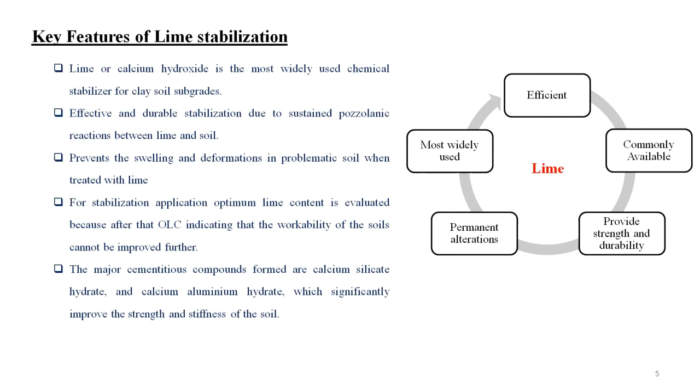Now moving to the sulfatic soil. From here onwards, I am going to discuss the problems, where the problem comes. Sulfatic soils, sometimes known as gypsiferous soil, gypseous soil, or sulfate bearing soil - these are terminologies used for sulfatic soil, which contains sulfates. Actually, sulfate is a compound that originates from any source like sodium sulfate, calcium sulfate, or magnesium sulfate. This sulfate brings problems in the lime stabilized soil.

That is what the title defines. So sulfatic content is a major concern - globally it extends over more than 20% of land. In India, it covers 0.06% of land, and it is majorly concentrated in the semi-arid regions of Rajasthan and Gujarat states. It is an alarming factor for lime stabilization, especially if sulfate is present in the soil itself, or is migrated from any other source like river, precipitation, or industrial waste.

It can accumulate in the soil and cause disruptions. So the problem of lime-stabilized sulfatic soil is that when lime-treated soil comes in contact with sulfate, this sulfate can come from anywhere—it can be present in the soil itself, or it can come from elsewhere.

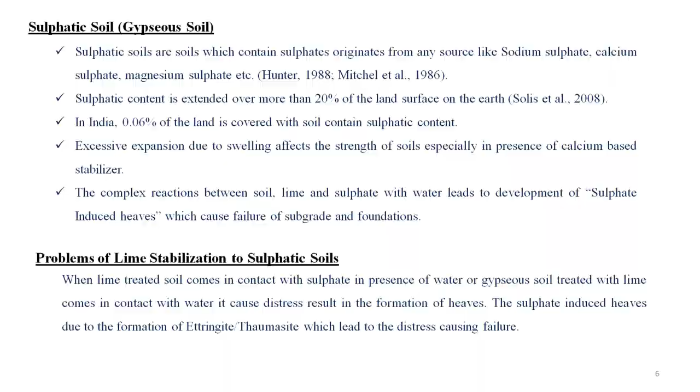This is what happened: even when we stabilized the expansive soil with lime, the lime-stabilized soil again showed disruption when sulfate entered it. So why does this happen in lime-stabilized soil? This is a study area actually.

So lime is also a calcium-based stabilizer. It means that when expansive soil has sulfatic compounds, it questions the validity of calcium-based stabilization, which we are talking about here with lime. So here we can understand the mechanism of sulfate-induced heave.

Calcium from lime, alumina silicate from soil, and sulfate from the sulfatic compound, in presence of water, undergo a complex reaction and form ettringite and thaumasite. Here are the chemical formulas—you can see 26 molecules are held up in the ettringite molecule, and 24 in thaumasite, and these are formed depending upon temperature and capacity.

You can also see ettringite can swell up to around 137%, and these two images show the bulging, or sulfate-induced heave, that happens, and this causes damage and subgrade failure.

So the literature review includes contributions from different researchers studying how lime stabilization is very efficient and effective in developing pozzolanic compounds. You can see studies ranging from 1992 to 2014, 2016, and 2018, including current research.

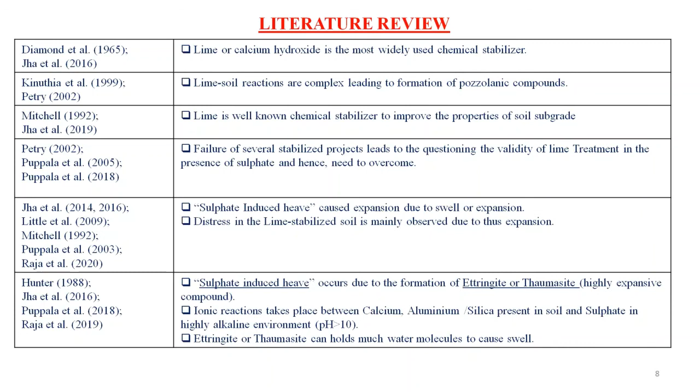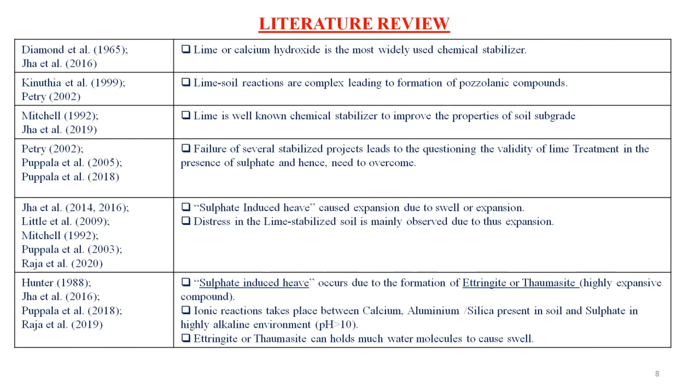This research shows that sulfate-induced heave occurs due to the formation of ettringite, which is an expansive, expansion-causing mineral, and depends on many factors like temperature and alkaline or acidic environment. These are the reasons it developed and caused distress even in lime-stabilized soil. So this is the main concern.

Moving to the motivation: huge economic losses are caused due to sulfate-induced damage, and research findings regarding the geotechnical behavior of soil are still inconsistent and insufficient, due to high sulfatic content accumulated in the majority of soils of Rajasthan. The controlling mechanism for change in behavior due to migration of sulfate-contaminated water into stabilized soil is not well understood yet.

Guidelines to stabilize sulfate-bearing soils are also not available. So from this problem statement and background study, the objective is to find out the geotechnical behavior of untreated soil and lime-treated, lime-stabilized soil. It means two sets of samples are compared: untreated soil with sulfate contamination, and lime-stabilized soil with sulfate contamination. The sulfate contamination is generated in the laboratory using sodium sulfate.

Sodium sulfate is used because of its highest solubility. So these are the materials and methodology. The soil we used is expansive soil, which is black cotton soil, collected from the areas of Jaipur, Rajasthan. The second additive, or admixture, used for stabilization of the expansive soil is lime.

6% lime is used, extracted for our study by conducting a pH test as per the method of Eades in 1966. Third, the sulfatic contamination agent is sodium sulfate here, and different molar solutions ranging from 1000 to 30,000 are prepared. So these are the methodologies.

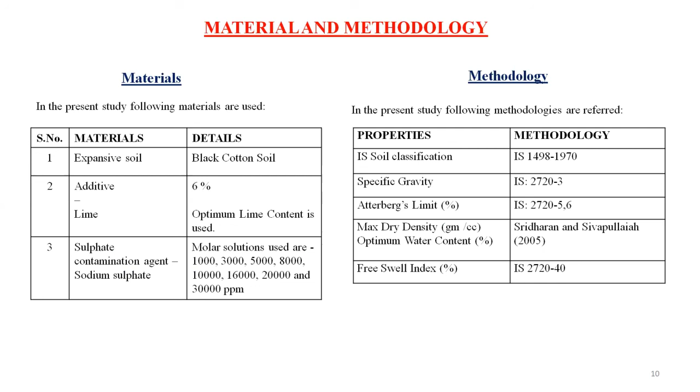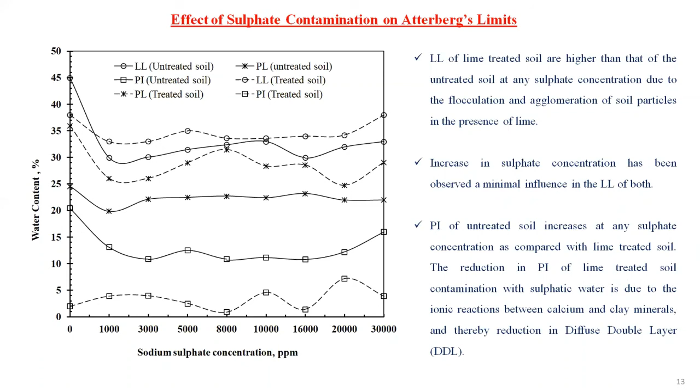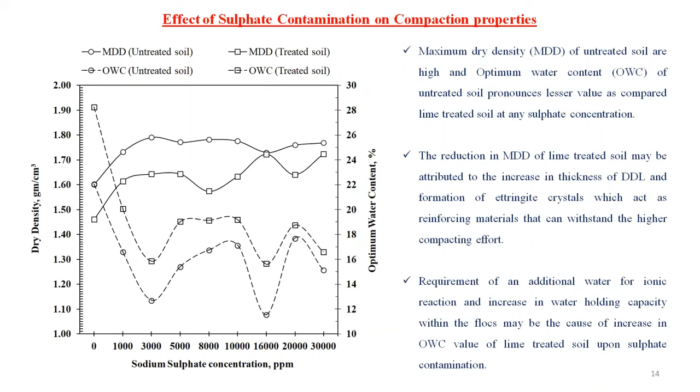PI of untreated soil increases at any sulfatic concentration as compared to lime treated soil. MDD of untreated soil is higher, and OWC of untreated soil shows a lesser value as compared to lime treated soil. This reduction in MDD of lime treated soil is due to the increase in the DDL and the formation of ettringite crystal, which acts as reinforcing material that can withstand higher compacting effort. Due to the higher absorption or accumulation of water molecules, OWC rises.

So from these studies, the conclusions are: first, sulfate contamination adversely affects the behavior of untreated and lime treated soil, especially lime treated soil. Second, the plasticity index of untreated soil reduces with lime treatment, even when contaminated with varying sulfatic concentration, and the liquid limit and plastic limit of lime treated soil are observed to be more.

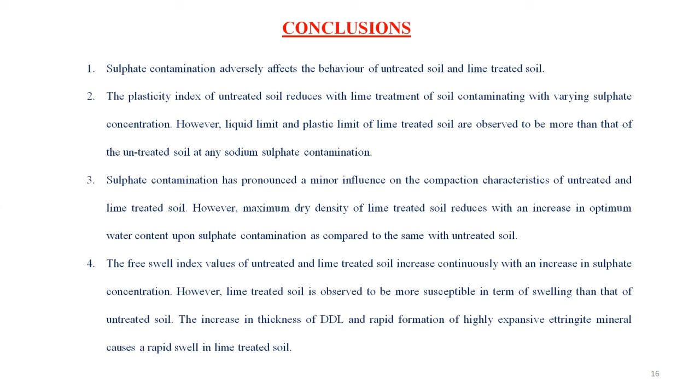Third, sulfatic contamination has a pronounced but minor influence on the compaction characteristics of untreated and lime treated soil. However, maximum dry density of lime treated soil reduces with the increase in OWC upon sulfatic contamination. Fourth, free swell index of untreated and lime treated soil increases continuously with progression of sulfatic contamination. This is due to the formation of the expansive mineral ettringite, which causes rapid swell in lime treated soil.